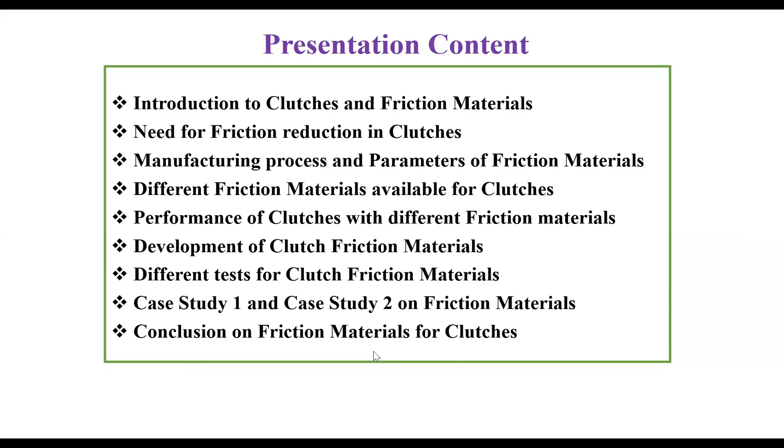First, the topic is introduction to clutches and friction materials. So what is the clutch all about? Clutch is nothing but a mechanical device that engages and disengages

the power transmission, especially from the driving shaft to the driven shaft. In these devices, one shaft is typically attached to an engine - one part to the engine and another part to the driving member or the power unit. So you have one driving member and one driven member, and finally you get the output power for work.

So how do the clutches perform, or how do they work? The clutch connects the two shafts so that they can either be locked together and spin at the same speed, or be decoupled and spin at different speeds. The clutch allows us to smoothly engage a spinning engine to a non-spinning transmission by controlling the slippage between them. And as I said, the friction material - why is this friction material needed

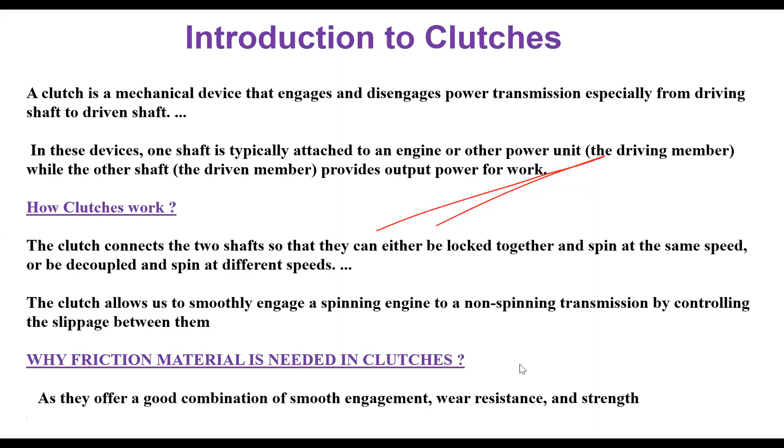Before going to the friction materials, I will be giving an overview about the clutch, the different types of clutches that you have, and then what are the clutches being used across automotive applications for different vehicle platforms like two-wheeler, three-wheeler, or four-wheeler, or commercial vehicles, trucks, or buses.

The clutch generally has different parts. One end of the clutch is connected to the engine, another end to the transmission. The clutch has different parts - it has the clutch disc, it has the flywheel. The rear end of the crankshaft is connected to the flywheel. You have the clutch disc, which is located between the flywheel and the pressure plate. This is the location where the clutch plate is, where you have the friction material.

There are other parts of the overall clutch - you have the clutch housing, so I'll give an overview about the clutch housing as well, how you need to design it. You also have the clutch fork, the stud, the clutch linkage, and the pressure plate.

The flywheel is a part that is permanently fixed to the engine crankshaft. As far as the friction surface is concerned, one surface is connected to the clutch disc, and one end of the clutch friction is connected to the pressure plate, and another end to the flywheel. You also have the springs, the diaphragm spring, and the clutch plate spring. I will explain that

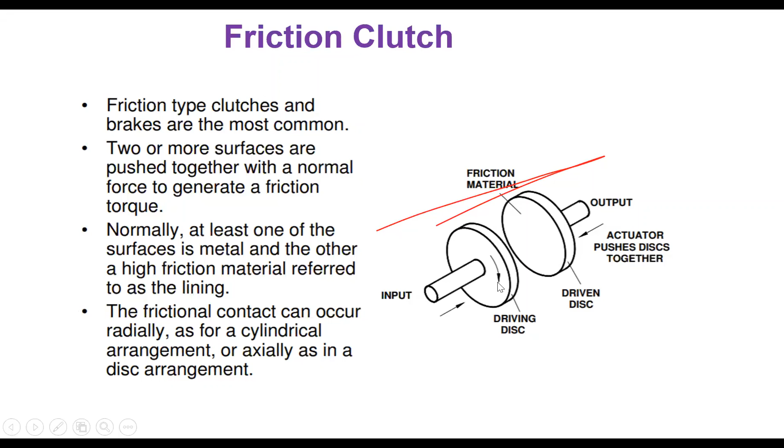And this is the clutch plate basically. You have the friction pad. This is how the friction pad looks. So we are going to see what are the different types of friction pad that we have, and at the same time, how the design should be that will improve the efficiency of the clutches. I will give an overview about this friction pad and the design of the friction pad along with the clutches.

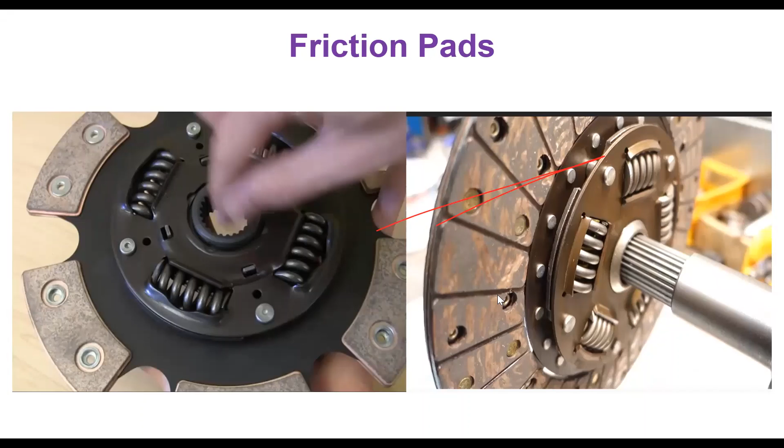So what is the function of the clutch? Let us talk about the clutch first, then we will go with the different types of material that we normally use in the case of a clutch. So you have the clutch in which you have two types of operations, one during the engagement and another during disengagement. When the clutch is engaged, the power flows from the engine to the transmission system, and the vehicle moves. This is the normal way the clutch is being applied and used.

And what happens when the clutch is disengaged? When you're disengaging the clutch, the power is not transmitted to the wheels, and the vehicle stops while the engine is still running. This is the basic funda of a clutch. The clutch is always kept engaged when the vehicle is moving. The clutch also permits the gradual taking up of the load when properly operated. It also prevents the jerking

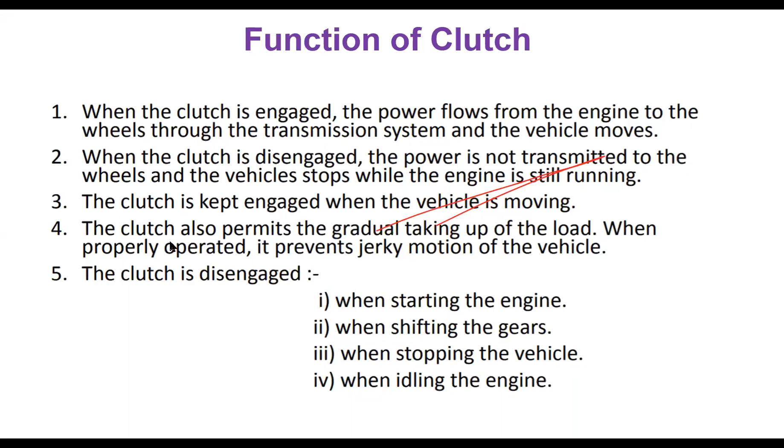motion of the vehicle. And during the following 4 conditions, the clutch is disengaged: when you're starting the engine, when you're shifting the gears, when you're going to stop the vehicle, and when the engine is kept idle. Under these 4 conditions, the clutch is in disengaged position. So when designing clutches, as we do in a company, we always look for these applications or parameters.

We need to understand what is the torque transmitted for the particular vehicle, and accordingly design the clutch: what is the gradual engagement, how much should be the heat dissipation, and the dynamic balancing. This is a very important requirement of a clutch. We also need to provide the vibration damping, and the size, meaning the inner diameter and outer diameter of the clutch plate and the pressure plate.

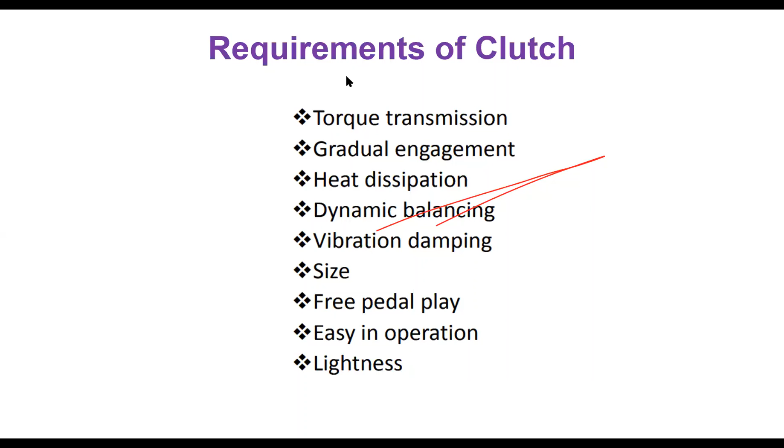So all this design is very important, and it also functions in such a way that the free pedal play should be much smoother, it is easy for operation, and the weight should be lesser. The overall weight of the clutch should also be lesser. These are all the requirements we normally look at when doing any clutch design from the company point of view.

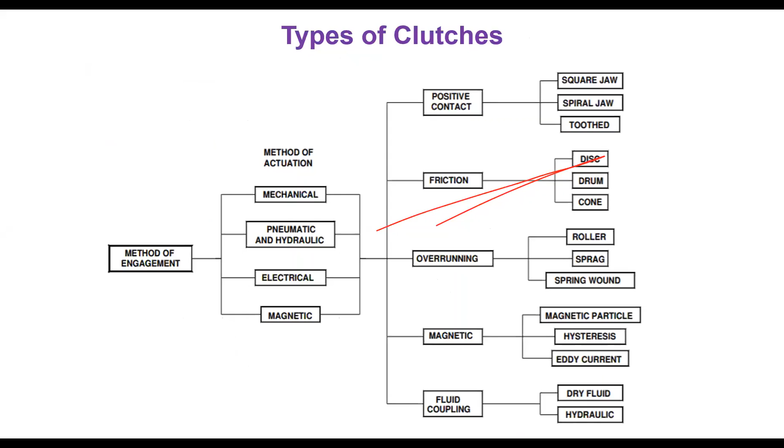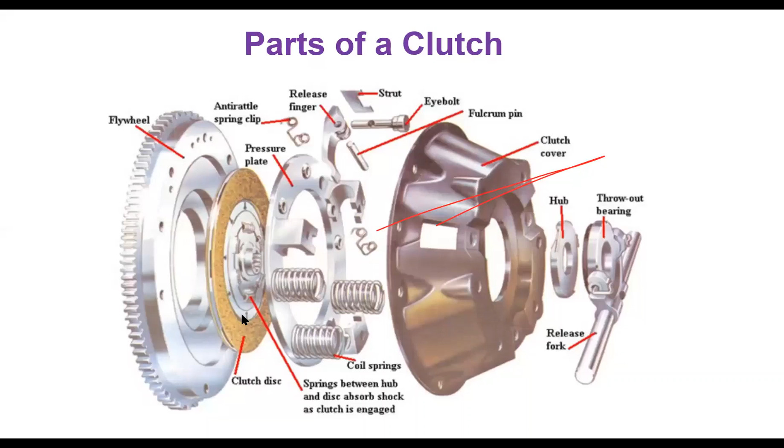And it should not allow any particles. And there should not be any gap in the clutch housing. Assume that this is the clutch housing; there should not be any gap, so it should be sealed properly. And if there is any gap, what happens? It may lead to leakage, and as a result, it may affect the clutch, basically the friction plate and what you call the pressure plate. And as a result, the performance of the clutch also drops to a low level.

And it should also do the force transfer, okay. So when you are engaging or disengaging the clutch, what happens? You are going to either apply or remove the force. Accordingly, the force gets transferred, and accordingly the load gets distributed, or the load is being applied or removed, okay.

And similarly, you are going to get the pressure or you are going to remove the pressure. Similarly, the clutch plate or the pressure plate is going to rotate or it is going to be in idle position. Either you can transmit the torque or not transmit the torque. Okay. So these are the things you are going to do. So as a result of that,

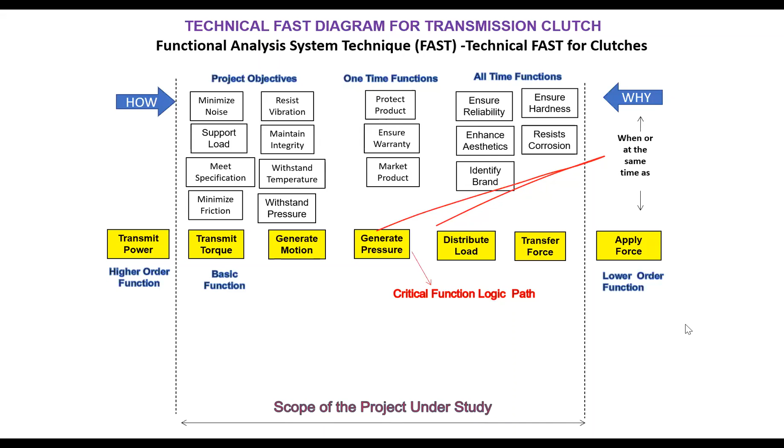what is important when you're designing the clutches is you need to ensure that you are going to satisfy the user or customer considering the utilization with respect to reliability, durability, strength, and performance, without affecting the function of the clutch. Okay, that is very much important.

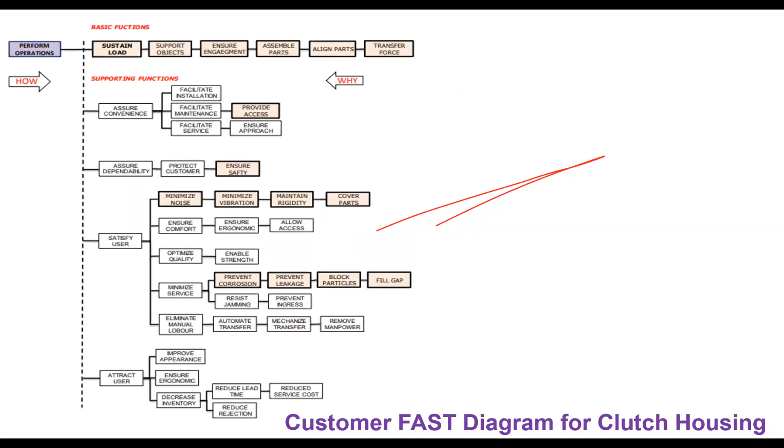And there are some other things as far as manufacturing is concerned. You need to reduce the cost of the product, the lead time, the manufacturing time, and the product should be free from quality issues. Basically, you need to reduce the rejection. These are the other points with respect to the customer point of view. This type of drawing, called a technical FAST diagram or customer FAST diagram, you can use for any application, not only clutches, but since the topic today is clutch and friction material, I have given this drawing to you.

We'll go with the need for friction reduction in clutches. So why do we need friction reduction from the clutch point of view? What is the necessity? The friction will be reduced by adding lubricants. Basically, this is to increase the life of the clutches. Here the material indicates the complete assembly, which is the clutch assembly. And the purpose of the lubricant is to reduce the friction between the two surfaces. One surface is attached to the pressure plate, another is attached to the flywheel.

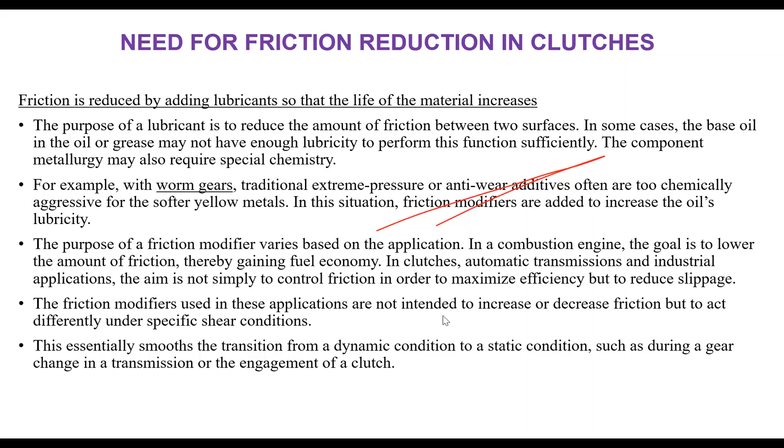And this friction reduction is very important because it helps for a smooth transition from the dynamic condition to the static condition, basically when you are changing the gear, or engaging or disengaging the clutch. So we'll see the manufacturing process and the different parameters used for clutch friction material.

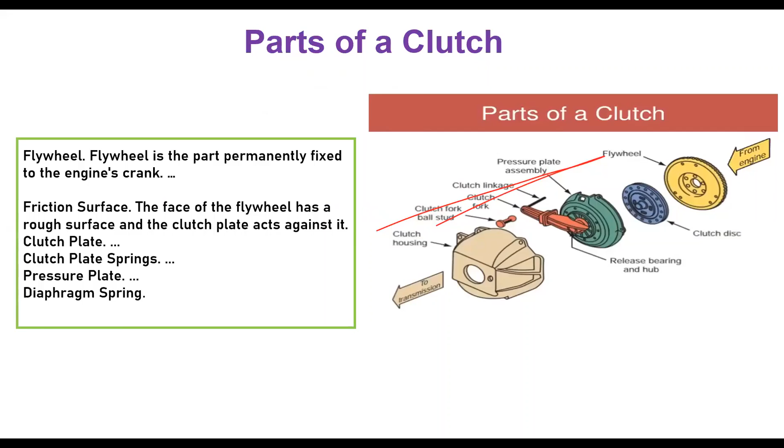So in the manufacturing process, the first step is to blend the raw material, and here you see the composition. You have different types of composition, and what we want is thermal resistance and friction characteristics for this composition. You need to select the composition such that it has the thermal resistance property as well as the friction characteristic property.

And when you're going for a blending of the raw material, you also need to see the strength and the density of the raw material such a way it is having the peeling resistance. It's not peel off. Okay, so it is basically stuck onto the clutch plate. And during the operation, when the clutch is rotating, the peeling strength should be much higher. It should stick itself to the clutch plate. Okay, it should not peel off. And again, you also need to ensure that the friction characteristics are met for a particular application.

And after blending, you're going to do the impregnation of the resin along with the hardening process, where it will also increase the peel strength and also the abrasion resistance strength. Finally, you're going to bond onto the core plates. Then you're going to have the final density of the particle. So these are all the parts of the manufacturing process of the friction plate, the friction process basically.

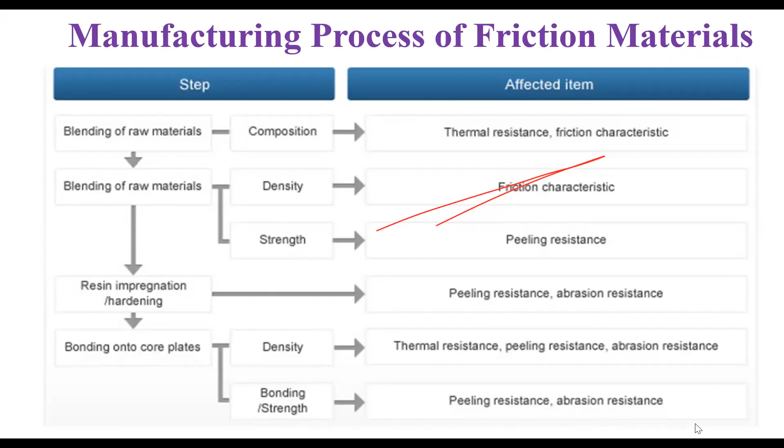So we have different parameters of the friction material, based on the manufacturing process and based on the different parameters. And this is some set of readings taken for 7 trials, 1 to 7 trials, and these are the average values with respect to the specific molding pressure in terms of MPa, molding temperature in degrees Celsius, molding time in minutes, heat treatment temperature, and also heat treatment time in hours.

And these are some of the readings taken only for the first three, and FT4, FT5 is not shown here. And this is the average value. Say for example, a specific molding pressure between 45 to 70 MPa is used for the friction materials, the molding temperature ranges between 155 to 175 degrees Celsius, the molding time between 5 to 12 minutes, the heat treatment temperature of 200 to 250 degrees Celsius, and the heat treatment time is 5 to 12 hours.

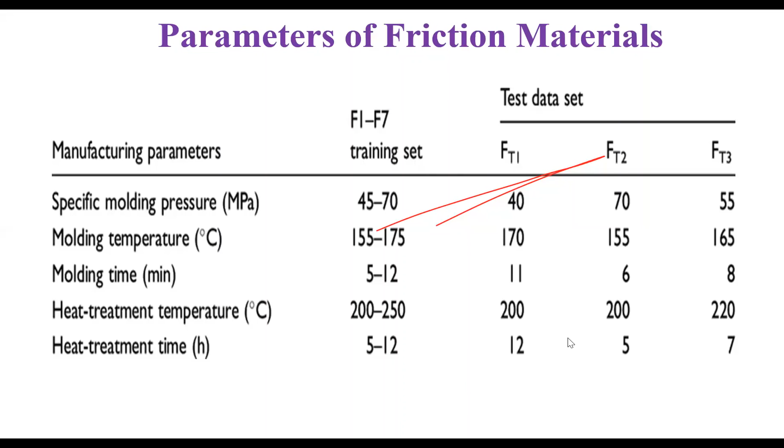So when you're designing the friction material for the clutches, you need to consider all these manufacturing parameters, and according to these parameters, you need to design the friction material for manufacturing that particular friction material into the clutch. So you have different friction materials available for clutches. When I was explaining the manufacturing process of a friction material, I told you about the bonding strength: how from the raw material you can go for bonding, and how you can increase the strength without affecting the performance of the clutch through these friction materials.

So you have different types of friction materials for a clutch. You have organic materials, heavy duty organic lining, ceramic material, Kevlar, Ferramic, and you also have the Ferramalloy lining. You need to use these different materials for different applications depending upon the load that the particular vehicle is going to have, because the load acting on a two-wheeler is different from a passenger car, the passenger car load is lesser than that of the racing car, and for a truck or commercial application, the load is different.

So you need to select the friction material considering the clutch application where you're going to use it, and that's why you need to select the material with respect to the application and also with respect to the cost. Okay, so cost versus performance is very much important. So as I said, the bonding of the raw material into the resin is very much important to achieve the friction property with respect to the peeling strength, abrasion resistant strength, overall hardness, etc.

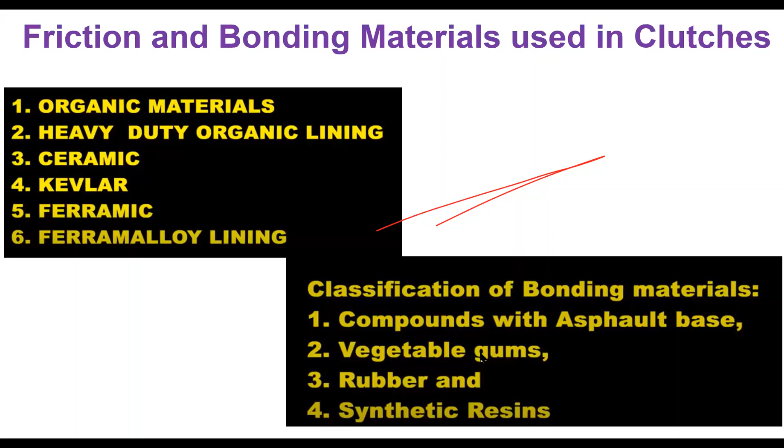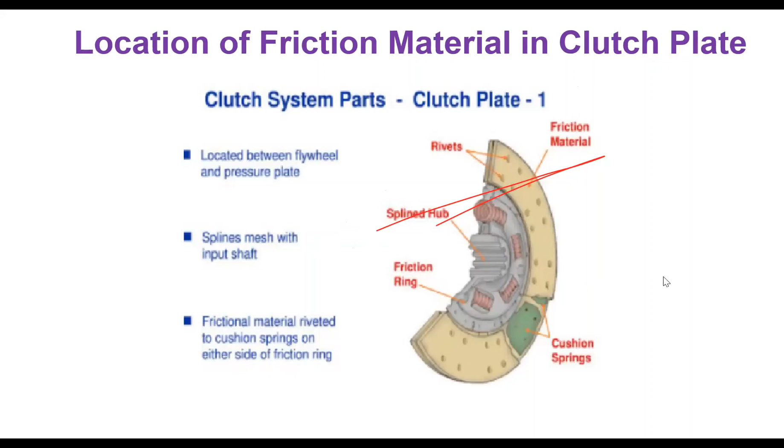So today the topic is more about the clutch friction material rather than clutches, but I am going to correlate this clutch along with the clutch friction materials. The first important friction material we are going to use is

Feram Alloy facing material, and this is the new material which is likely to replace the ceramic facing. This Ferram Alloy offers a similar level of wear and temperature resistance compared to ceramics. So you have ceramic material, right? This is one of the alternatives to ceramic material, but with a much better static to dynamic ratio - much better than that of ceramic - and this helps for better, smoother engagement of the clutch. Compared to the ceramic material, this Ferram Alloy is much better.

The other advantage is you also have the chatter noise - you have chatter during the engagement and disengagement of the clutch. When you go with this Ferram Alloy facing, this type of issue is avoided. Rather than going with ceramic facing, when you go with the Ferram Alloy facing, you tend to have lesser chatter issue.

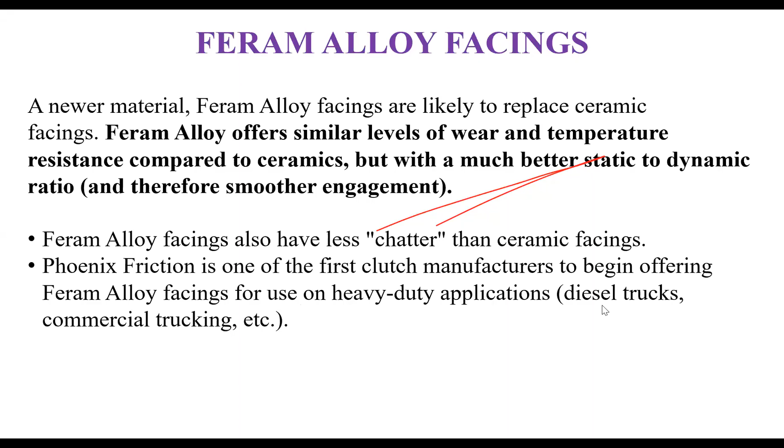The next important thing is the organic friction material. This is one picture of the organic friction material, and this has been used in almost all cases. You have two types of organic friction material - one is molded facing, another is woven facing. In many cases, woven facing is better than the molded one.

We use this for a better combination of performance, durability, drivability, and cost. When going with the organic facing, you have material made up of resins, phenolic resins. You also have friction modifiers like metallic powder - some powder that can be mixed with metal oxides, or compounded with rubber. This friction material facing comes in two types as I said.

One is the molded one, another is woven. Woven is somewhat better than the molded one. So for the same comparison, with outer diameter of 11 inch and inner diameter of 6.5 inch, for the same design of clutch plate, the woven facing can run up to 10,000 rpm, whereas the molded facing can even burst at 5,000 rpm. So the problem with the molded facing is the strength - it is very cheap, and with respect to cost it's okay, but the strength is very important.

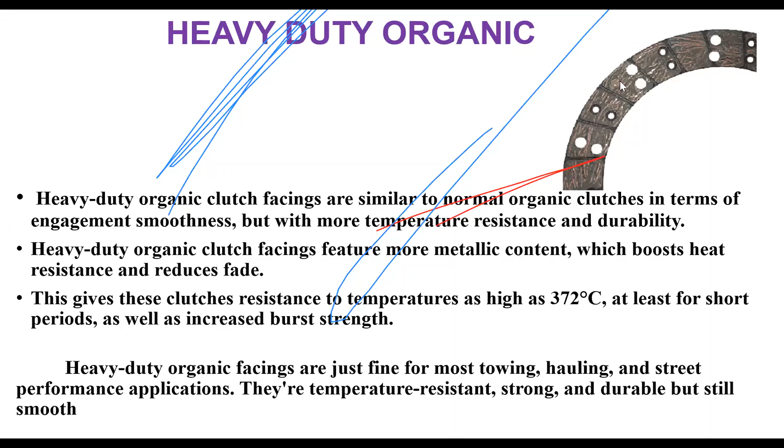As the name indicates, heavy duty organic is used for heavy duty applications, mostly for towing, hauling, overhauling, and street performance applications. They are temperature resistant, very strong, very durable, and still very smooth. This is the most commonly used material that you have seen.

Ceramic friction material is quite common. These ceramic clutch facings are made up of a mixture of different compositions like copper, iron, tin, bronze, silicon dioxide, and graphite. The material is processed using sintering or brazing onto a backing plate, and this is also riveted. As I told you, for the riveting operation you need a bolt, and this has been riveted to the main clutch plate.

This ceramic clutch facing material can withstand high temperature, and it can operate without any issue or fading, loss of material up to 538 degrees Celsius. So higher the temperature, you also have an advantage.

This is mostly used for racing applications where you go for a multi-plate clutch if required, because there the performance and speed of the vehicle is more. Obviously the clutch is going to get engaged during operation, or again during cornering you sometimes need to go for disengagement. Considering that engagement or disengagement, especially in the racing car, the performance is very important. In such applications, you go with ceramic material.

Now we'll see the performance of the clutches with different materials, so how the clutch is going to perform without friction. So why do you need to have friction material in any clutch? What is the need of having friction material in a clutch, and how will the clutch perform with and without friction material?

I'm going to highlight only the very important points because we have a lot to discuss, but I will just highlight the important things. Clutch performance could be improved by grooving the friction material to allow wear debris to escape from the permanently contacting surfaces. I'm going to give you one case study where the grooving pattern plays a vital role in increasing the resistance, while also helping to reduce the friction of the clutch.

And the performance of the organic material with respect to the sintered friction material, with and without the friction material, the advantage is that it also helps reduce the load on the clutch.

When you're reducing the load to the clutch with the help of this friction material, friction facing material, you are going to reduce the temperature. You're also going to reduce the force during the clamp up or clamp down, and you're also going to operate the clutch with the maximum work output or input at the same time. You're going to get the better output as well.

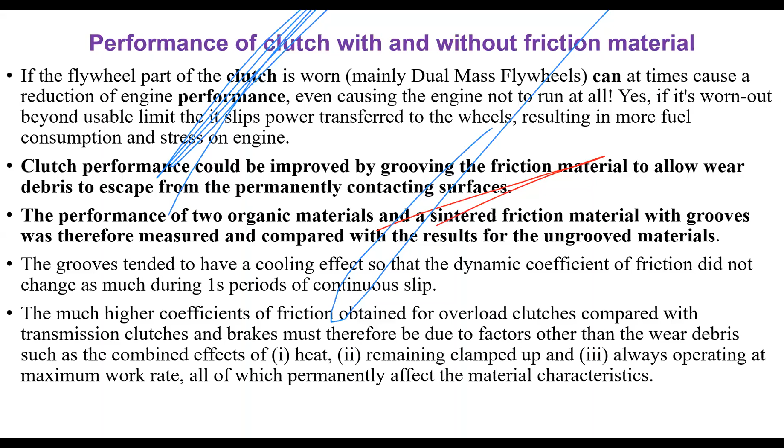So when you have the cooling effect because of the high friction that you have, what happens is the dynamic coefficient of friction did not change, and when the dynamic coefficient of friction is not going to change, basically the static friction should be higher and dynamic coefficient of friction should be lower. So when you have lower dynamic coefficient of friction, it will not go to the high temperature basically. So that is one advantage that you have when you're going with the friction material when you're designing the clutch.

So we'll see some of the development of a clutch friction material that have happened recently. We have different type of friction materials that is been used for brakes as well as for clutches as well. I'm just going to touch upon the brakes as well because the friction is quite common even for the brakes as well as for the clutches. But clutch is quite sensitive when you are going for a design, because brake is also very much sensitive. But here, the topic today is clutch. We will see it more into the clutch application of the friction material.

So we have seen many types which involves ceramic, Kevlar, Feram Alloy, organic for a heavy duty and for a woven application. And here, friction material types are being categorized; for clutch it has been classified as clutch facing and clutch disc, even for clutch material and clutch sets, and friction disc as well. So in the case of friction clutch, what you have is a friction disc. Basically, we have multi-plate clutch where we have many friction discs as well.

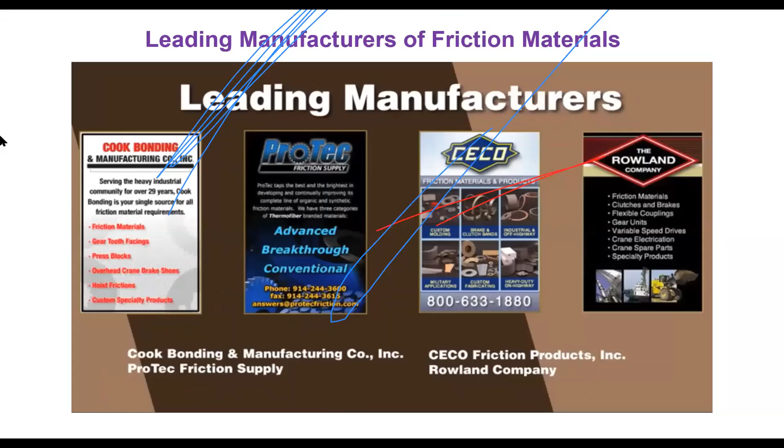And with respect to the brake, you are going to use this friction material in the case of brake pad. And again, it can be with respect to the disc application, or it can be a ceramic application for the brake pad, and brake lining, and also for a brake band, and also brake blocks. Also, this friction material is playing a vital role. There are many leading manufacturers of the friction material across the globe. These are some of the companies.

And these are some of the leading manufacturers across the globe who are into the friction materials, supplying to the clutch manufacturing company. And the company name is Cook Bonding and Manufacturing. It's again an international based company, and they also apply it to some other industrial heavy duty application. They also use it for some of the application with respect to the gear tooth also. Okay, and for some of the press application, even for the customized special products, they also supply these friction materials to them.

And the other company is Protec, also a world renowned company with respect to the supply of the friction material, CECO and Rowland. So this is a very good company, Rowland, and they supply to clutches as well as to the brakes, and even to the gear units.

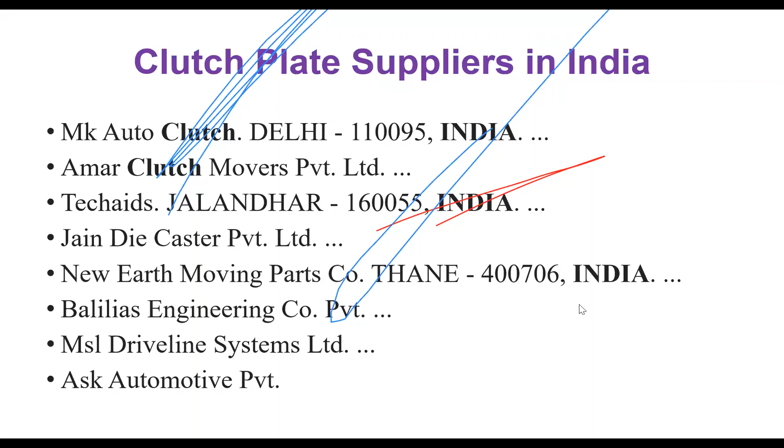In Mumbai, Thane, you have the New Earth Moving Parts Company. You have Balilias Engineering Company. You have MSL Driveline Systems Limited and Ask Automotive Private Limited. So all these companies manufacture the clutch plate for the clutch manufacturing company, what we call the tier one company.

And both these two companies are good with respect to performance. But having said that, it doesn't mean that the other two companies are not good. They also have the capability, but with respect to the application required for Mahindra or PSA, they were not able to meet it, in the sense the confidence level was not obtained with those two companies.

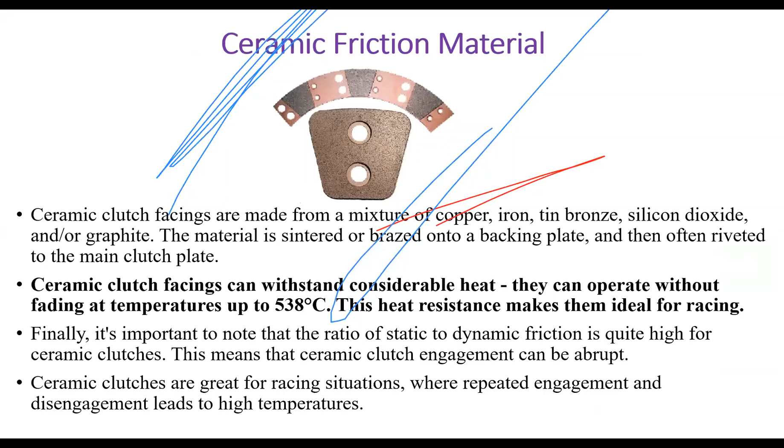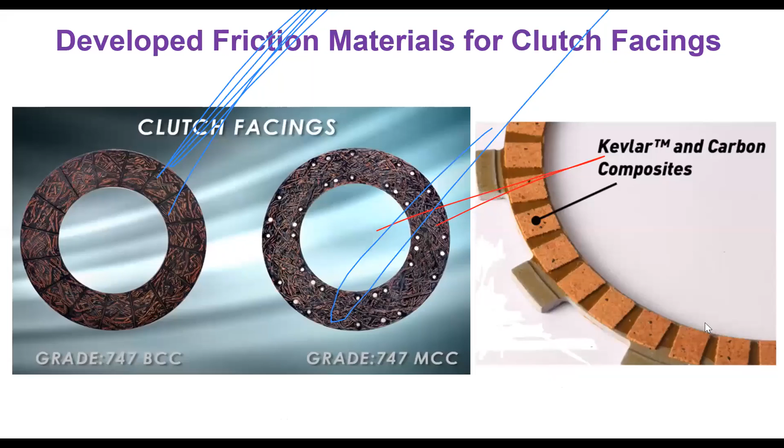And you can also make the friction material of Kevlar along with carbon composites. Kevlar, as I said, has been mostly used for longevity applications. When you're going for long durability and using Kevlar along with the carbon composite, the performance can be much higher.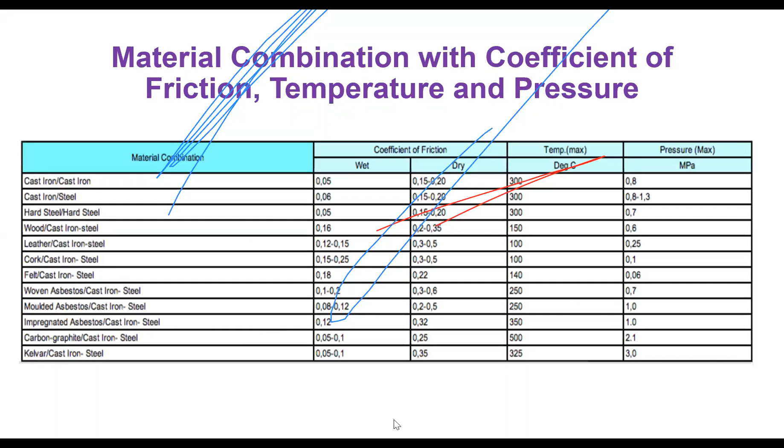You need to look for the design of the clutch plate, and you have the material combination with respect to the different coefficient of friction and the temperature as well as pressure. So you have different friction materials here. So I told you molded, woven, sintered metal, cork, wood, cast iron, hard steel.

Okay. Hard steel, and at the same time you have the wood as well. Okay, all these friction materials have different dynamic coefficients of friction. And I told you the dynamic coefficient of friction should be lesser than the static coefficient of friction. So static friction can be higher.

Okay. What is the meaning of static friction? So when the clutch plate is not rotating, even if I have friction, it doesn't matter. But when the clutch plate is rotating, in the dynamic position, when the friction is going to be higher, then it is always a problem. So this is where the challenge lies.

Okay, in fact, I have not worked too much on the friction coefficient in depth, but all this information I got when I was developing the clutch along with the suppliers. Okay, so this is always a learning process, but the source starts from the friction material to the clutch plate supplier, and from clutch plate to the clutch company, and from the clutch company to the OEM. Okay, this is a very long process.

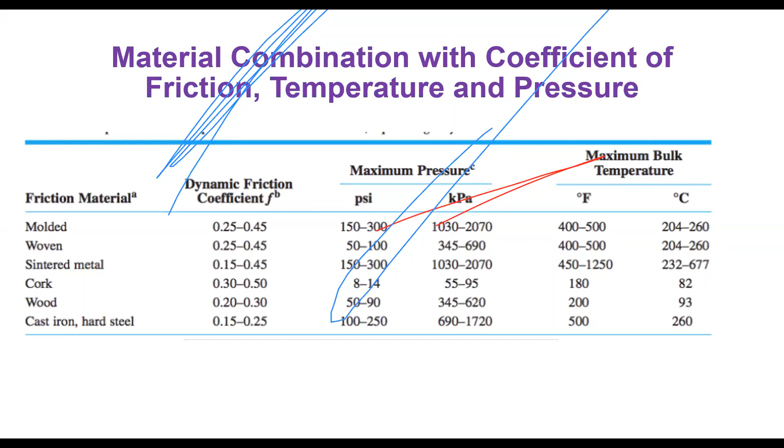But looking at the performance, you can also correlate the friction importance, the friction materials that you can use along with the clutches. So now I'm going to explain the different types of tests that normally you will have for clutches. It's not only for clutch friction material, but this is applicable for the clutch as well. Because we don't have specific tests for friction material alone, but we are going to test the clutch friction material along with the clutches. These are the tests that normally you do for a clutch in any company.

When I was developing the clutch, we have done all these tests as an OEM. We have done a gear shifting test for 500 hours, where you shift the gear: first gear, second gear, third gear, reverse gear, and the fourth gear, I mean sixth gear. So different gears you select, and we do it for 500 hours, and we also do the test for 1,000 hours as well. We also do the start-stop test: continuous engagement and disengagement of the clutch for 1,000 hours continuously.

And we also did some tests for 1 lakh kilometers, covering the city durability test to ensure that the clutch and also the clutch friction material is not going to fail. Here is the validation for the clutch and also for the clutch friction material. So basically, this is for the clutch, not for clutch friction alone. I'm going to test the complete clutch, and we are also going to test some of the friction and wear in static condition and also dynamic condition.

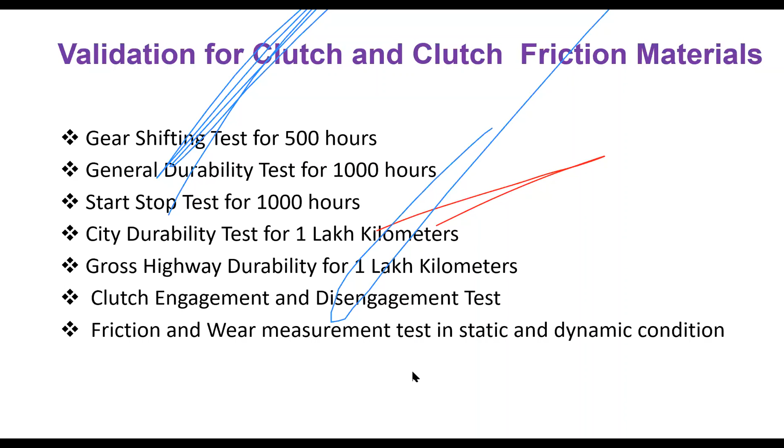Why the static condition is required here is because mostly we are going to test the dynamic, but even some of the static friction we are going to test, so that we are going to experience the confidence that the limit is going to be within the specification. And this is the speed, different velocity in meters per second, and along with that you have the friction coefficient.

You see, you have three types of friction coefficient. One is bad friction coefficient, good friction coefficient, and too low friction coefficient. You see, the friction coefficient should be higher when the speed is going to be higher.

Okay. See, friction is very important. Okay, for some cases, friction is important. Okay, if you have friction, it's good, but at the same time, when you see the graph, it is declining, which means higher. I mean, at the start of the test or start of the operation, you see the friction is higher, and friction is going to reduce when it is running. This is not a good sign, but this is a good sign.

Initially, the friction is lesser, and when it is starting, it should gradually increase with respect to the speed of the clutch. Okay, and you also have the friction coefficient, which is too low. Okay, but normally, considering these three graphs, we always go with a good friction coefficient with respect to the sliding speed. So here the sliding speed is nothing but how it is going to get slid over to the pressure plate or to the flywheel.

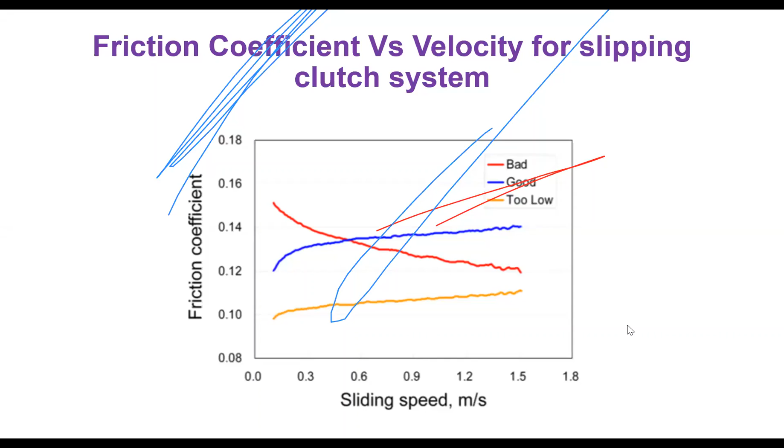So now I'm going to close the topic with two case studies. And again we are going to see some of the failures also, how the failure can happen because of the friction material in the clutch. Okay, the first case study is the dynamic analysis of a single plate clutch using different friction materials. So we are going to use different friction materials and we are going to analyze the single plate clutch using the dynamic performance.

So the objective here is to carry out the dynamic analysis of a friction plate using different friction materials. So we're going to use the sintered metal where we can reduce the wear of the friction plate. Stress, and then the deformation. These are the values that we are going to get for the friction material. It is being used against steel or cast iron. And here the coefficient of friction is between 0.15 to 0.45, and the maximum pressure is 1030 to 2070, and the maximum temperature can go up to 677 degrees Celsius.

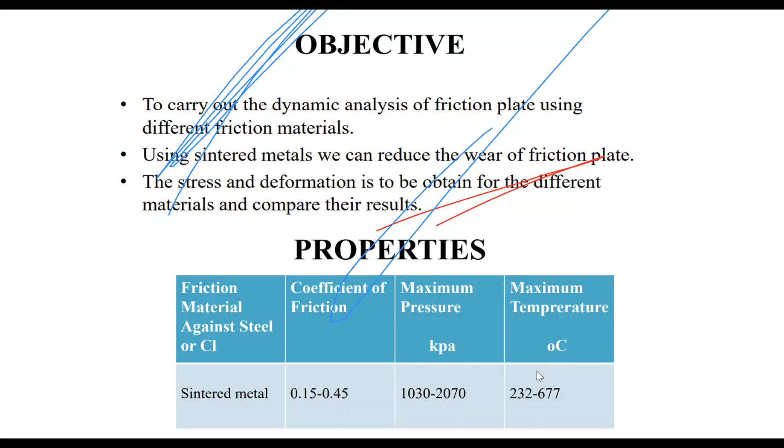And there are some of the problems, and you see here, as I said, the dynamic analysis. Okay, when you're going for a dynamic analysis, you may also have some problems with respect to clutch deformation, distortion, basically. Clutch performance gets reduced, okay, and even the clutch gets burst, even the clutch gets crushed, okay, and you would have seen all these problems because of the friction material. The clutch can get distorted or the performance can go lower. The clutch can burst, the clutch can even crush because of the friction material.

Say for example, if you're going for unsuitable friction material, if you're not selecting the proper friction material, the clutch can get distorted. And when you're not going for proper lubrication, and say for example, if you're going for excess oil or grease onto the friction material or onto the opposing face, what happens is your performance of the clutch gets reduced. So the clutch friction and the friction material and the clutch are directly correlated. Okay, and what are the characteristics?

You see the characteristic clutch distortion is because of the facing going out of flatness, running at a higher operating temperature. When the clutch is underperforming, the performance of the clutch is going to be lower, and it is because of a decrease in the coefficient of friction, giving a permanent loss from the performance point of view. And the clutch burst can also happen because of high stress acting onto the facing. That's why the friction materials should also withstand more load, okay, especially when running at high speed. And this is because of the material splitting, and then it is getting removed from the clutch plate.

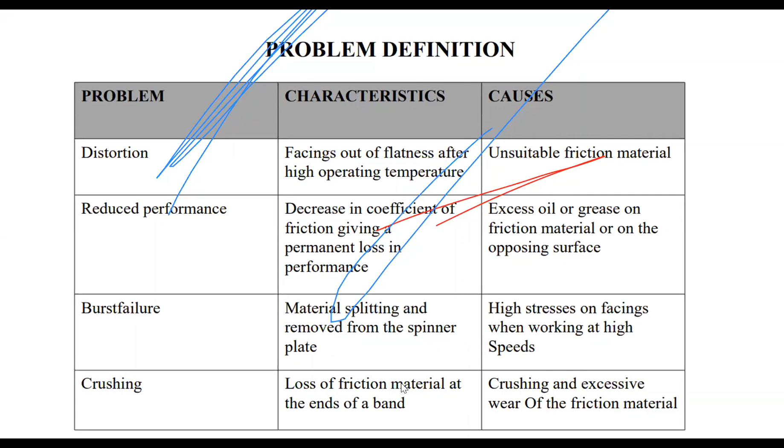And the clutch can also get crushed because of the loss of friction material at the end of the band. And this is because of the crushing and excessive wear of the friction material. This is how the clutch gets the problem of either distortion or crushing. You see, the complete failure happens because of the friction material.

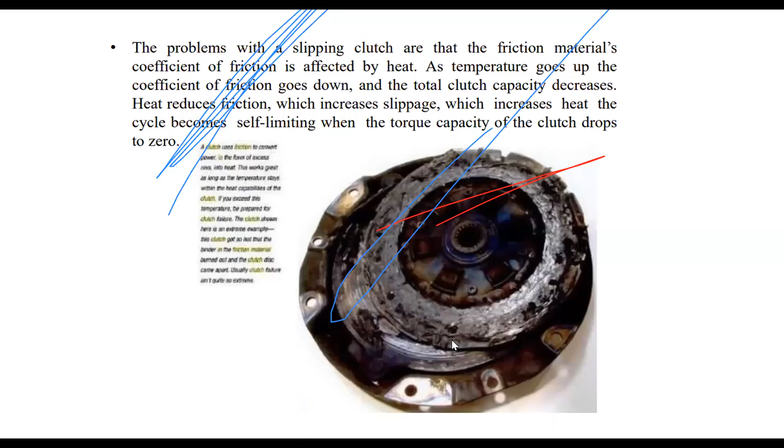And what happens is the heat reduces the friction, which increases the slippage, and finally the heat is playing a vital role, and finally the clutch capacity drops to zero, and finally it slips away. And these are some of the failures of the clutch, and how they are related or correlated to the friction material.

You see, the clutch slip is going to happen because of excessive grease being applied to the input shaft spline, or the friction material getting contaminated with grease or oil during fitment. Clutch failure can also happen because of an oil leak from the engine or gearbox. But the topic here, our interest is with respect to friction material.

See, when the friction material gets contaminated with grease or oil, this can lead to clutch slip. So what is the action for this, or what is the solution? The solution here is to use only the grease supplied, in the required quantity, and also ensure that the friction material is very clean before you fit the clutch plate into the clutch.

And again, this clutch slip can also be a problem with respect to the facing material being broken away, and the friction material getting damaged before you fit it to the clutch. And you can also get overheating due to the slip.

And if you have an incorrect clutch fitted for the application, say for example, if you select the wrong clutch plate for your clutch, that will also lead to clutch slippage. The action here is to handle it with care, ensure you use the correct clutch for the proper application, rectify the slipping, and ensure you do not abuse the clutch during operation.

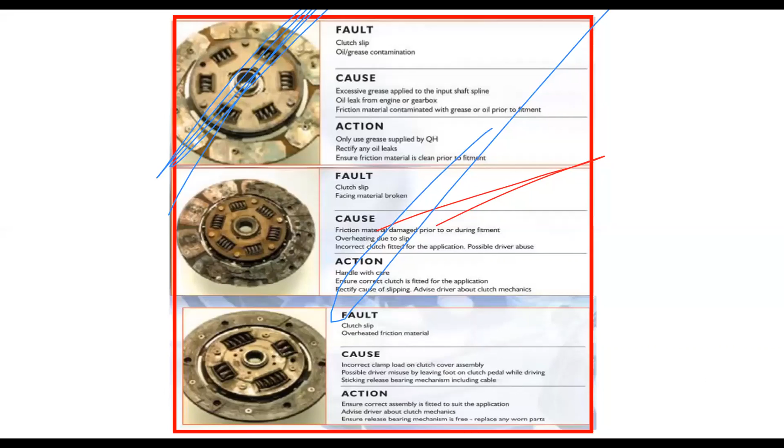And what can be the action? Here you can go with the correct assembly to suit the application. At the same time, you can go for freeing the release bearing mechanism, or replacing one or two parts. Okay, this is the methodology that you normally use for the clutch plate and the clutch.

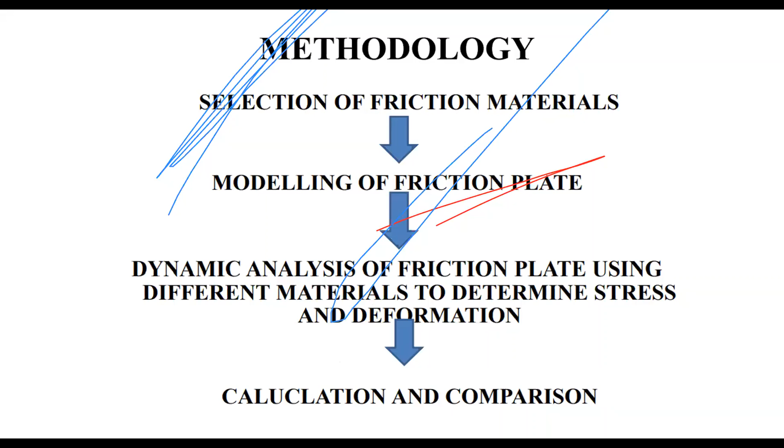So you need to select the friction material, then go for modeling of the friction plate. Then you need to go for a dynamic analysis of the friction plate using different materials to determine the stress, and at the same time how much deformation is going to come. And finally, you need to calculate and compare the results with respect to the different friction materials.

When you select a friction material, you have different grades. For example, you have Distaloy SA, Distaloy AB, Distaloy SE, and Distaloy AE. These four are used for different applications. For example, Distaloy SA has 1.75 percent nickel, 1.5 percent copper, 0.5 percent molybdenum, and the grade used for this Distaloy SA is SC 100.26.

And this Distaloy SA is meant for high green strength, and it can also be used along with sponge iron powder, and this material has a high strength.

It also yields better after sintering, and responds better to heat treatment. What does this distaloy AB stand for? It stands for a chemical composition similar to that of SA, but based on atomized property. Here, the material properties come in the form of very fine powder.

Whereas this is also a powder, it's in the form of spongy material. But here you can see it's not spongy, it's in the form of powder. It has high compressibility strength, and this also responds well to subsequent heat treatment, similar to distaloy SA.

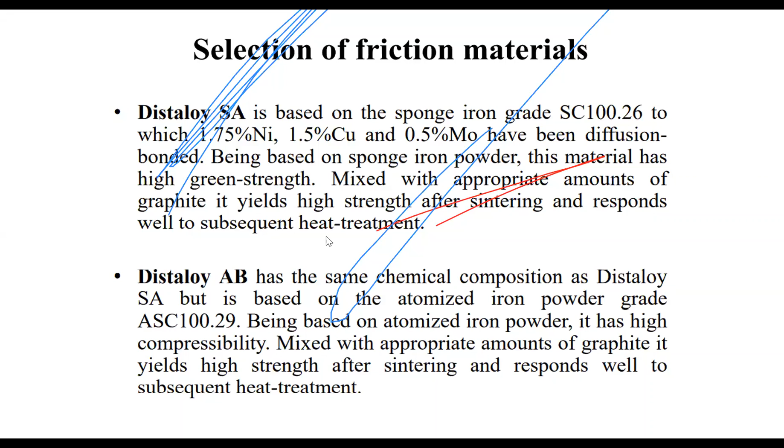The next important thing is distaloy SE. It is again a spongy iron grade, having a different composition of nickel, copper, and molybdenum, and it also responds better to heat treatment.

The last one is distaloy AE. It comes in the form of fine powder having the grade of ASC 100.29, and this also has high strength, better compressibility strength, and it also responds better to the heat treatment process.

These are the different grades, SA, SE, having different compositions, and you need to select based on compressibility strength, density, yield strength, elongation, impact strength, and hardness. I won't say one is better than another - you need to select based on requirements, and we normally go with high strength, high hardness.

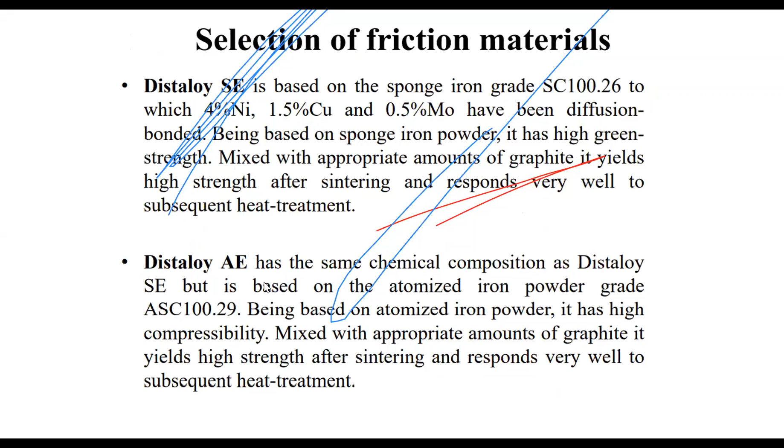The high hardness goes for the heat treated AE, which is nothing but distaloy AE. We normally go with this distaloy AE, which has high hardness, and the impact strength is also much better here.

But you need to see whether this much hardness is required or not. At the same time, the yield strength is also higher here, the elongation is also higher, and the density is also higher. But this is not good for compressible strength.

If you want compressible strength, you need to go with the grade of E. At the same time, you can also go with or without heat treatment.

When you go for heat treatment, you lose some compressibility strength, but before heat treatment, you can have better compressibility. So you need to see which application you need. But when you go for heat treatment, your strength and hardness get increased.

That's why you can see the difference of almost 200 HV gets increased after heat treatment.

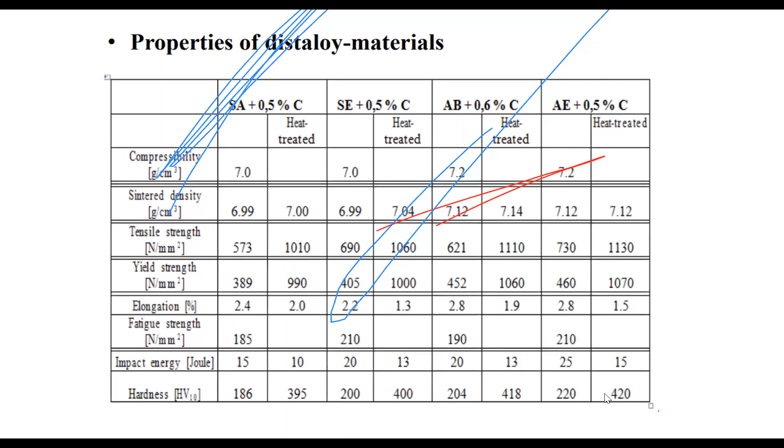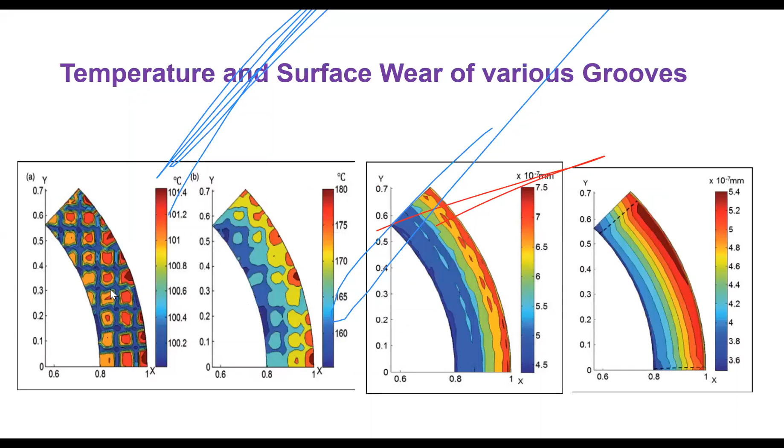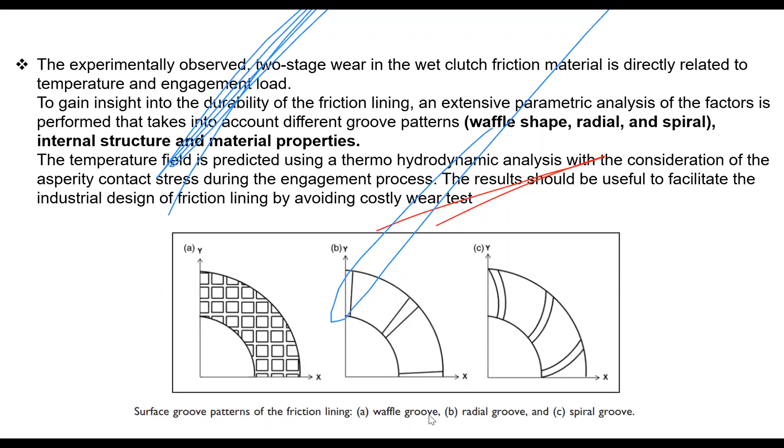Based on the temperature and wear of this groove pattern friction lining material in the clutch plate along with the clutch, the performance is much better for the waffle groove rather than for a radial groove or a spiral groove.

Let us conclude the topic with respect to what we have seen about the friction material and how it plays a vital role in increasing the performance of clutches.

As I said, the clutch friction materials are used in automotive applications. They can also be used for motorcycles, construction machinery, and agriculture industries. This helps for controlling speed and gear shifting in vehicles ranging from tractors to race cars - it is applicable for all applications.

This friction material also has different compositions made up of ceramic or different composite materials, used this way for the clutch. These friction materials are useful in terms of quality, friction resistance, and strength, and they come in the form of either a fiber or a powder.

This is better for the adhesive properties, and this has been riveted, as I said, you're going to use this in the clutch plate where it is going to get riveted with the help of the bolt into the spring. And these friction materials are often very rough, and they are also textured.

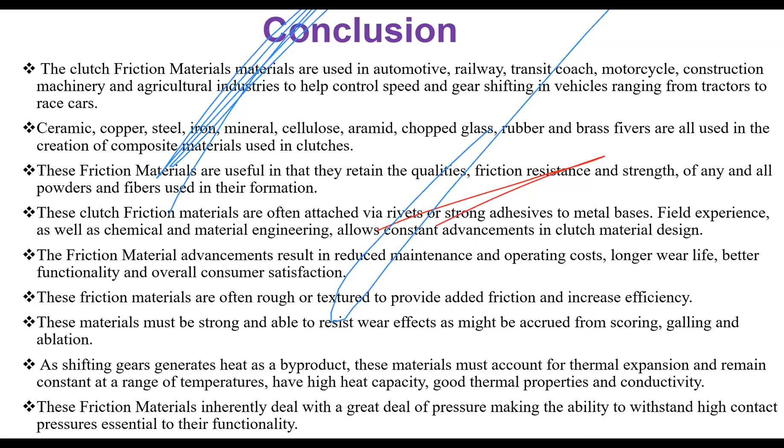When you have high pressure, you also have a lot of issues with respect to the peel off strength, or the load is too high or stress is too high. Again, during continuous engagement, you also have some fading issues or high temperature application, and this will also lead to the loss of function of the clutch. So in order to save the clutch, the clutch friction material is also very important. The clutch and clutch friction material always go hand in hand.